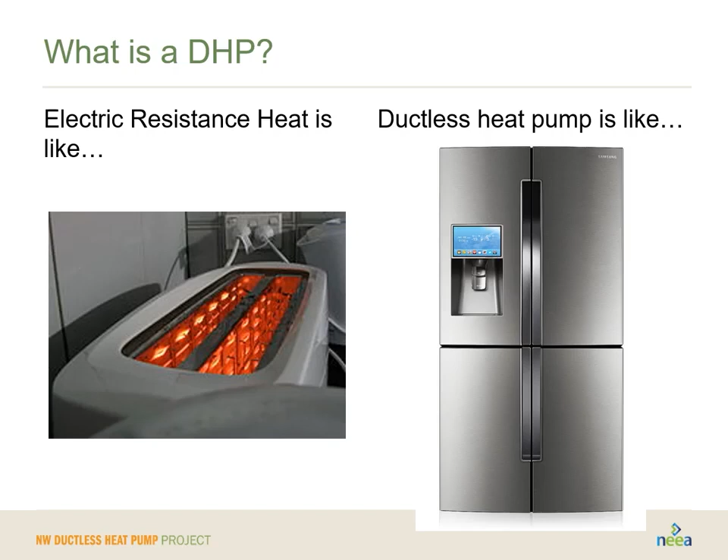So the very basics when you're trying to have this explanation for a homeowner, have them look in their kitchen. Most people have a toaster or toaster oven, and almost everyone has a refrigerator or freezer. That's an excellent starting comparison to help people understand the basics of the technology.

That is the outdoor compressor, and that is where a lot of the magic happens in terms of taking heat out of the outdoor air, putting it into refrigerant and moving that refrigerant into the home, or the reverse, taking heat out of the home and releasing it to the outside. This compressor allows us in a ductless heat pump to do both heating and cooling in the home. So bringing in a DHP, you're actually bringing in a high efficiency heating system and a high efficiency cooling system because of that outdoor compressor.

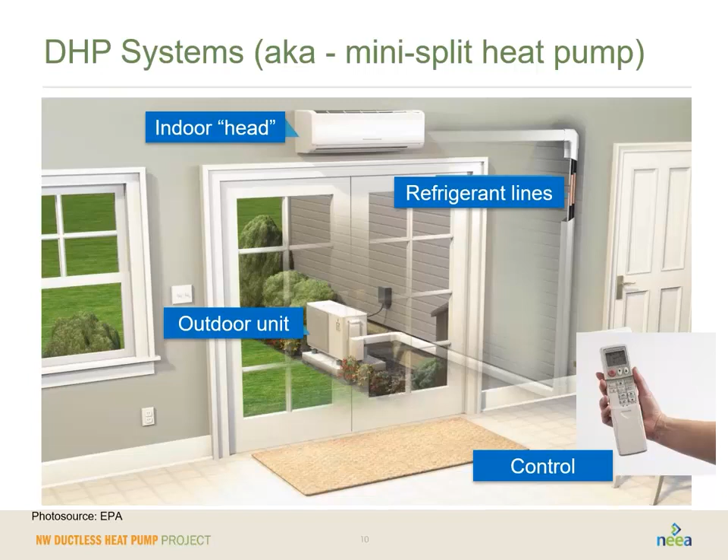Some folks will actually talk about ductless heat pumps and say, are these magic? How are we actually creating heat? And how can this be more efficient than electric resistance? It seems like it's magic. It seems too good to be true. Well, heat pumps don't actually create heat. Heat pumps use refrigerant to move heat.

And believe it or not, ductless heat pumps can actually move heat from outside to inside, even down to 5 to -10 degrees, depending on the brand and whether or not you get what's called a cold climate heat pump. It does this through a cycle where it compresses refrigerant or allows refrigerant to expand. As you compress or expand refrigerant, you can either absorb or release energy. As you absorb energy, what's left behind is a cooling sensation. When you release it or compress it, you create a heating sensation.

So we're just really moving heat around. We're not actually creating it. And it does take some electricity to do this, but we can actually get almost 300% or more efficiency by using these refrigerants and using these outdoor compressors and indoor evaporators to do this kind of work. More so than that, we're actually using energy that's been provided by the sun. So in a way, you could say that these are a type of mechanism that use solar energy.

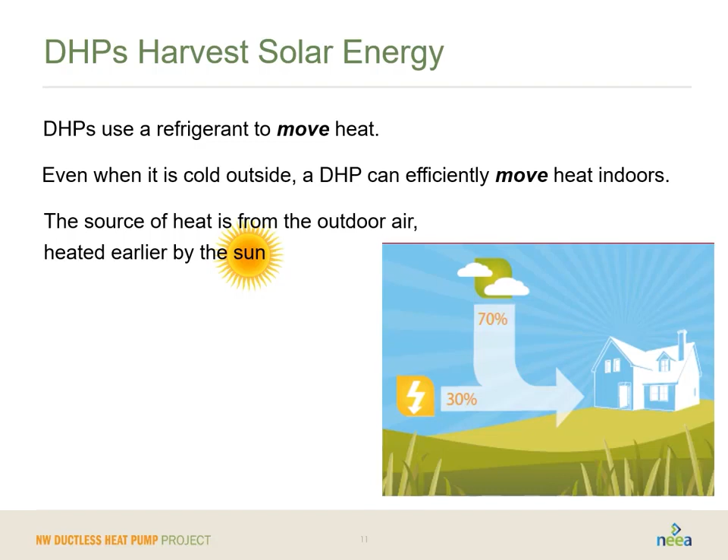And again, even if it's -10 to +5 degrees, in other words, very cold, like some of the parts of the Northwest are, even in those temperatures, there's a reason why it's not -50 at night. There's a reason why it's not -100 during the winter. And that is because that solar energy gets absorbed and re-released. And we're simply using this refrigerant cycle to move some of that heat into the house in the winter to heat it, or to remove heat from the house in the summer to cool it.

Remember I mentioned these things are around 300% efficient. It's kind of like you buy one and you get two free in terms of units of energy. You put 100% electricity in, you get 300% heat or cool out. It's almost a buy one, get two free type of scenario. Again, that's because the refrigerant cycle really works well with compression and expansion of moving heat from outdoors to indoors or from indoors to outdoors.

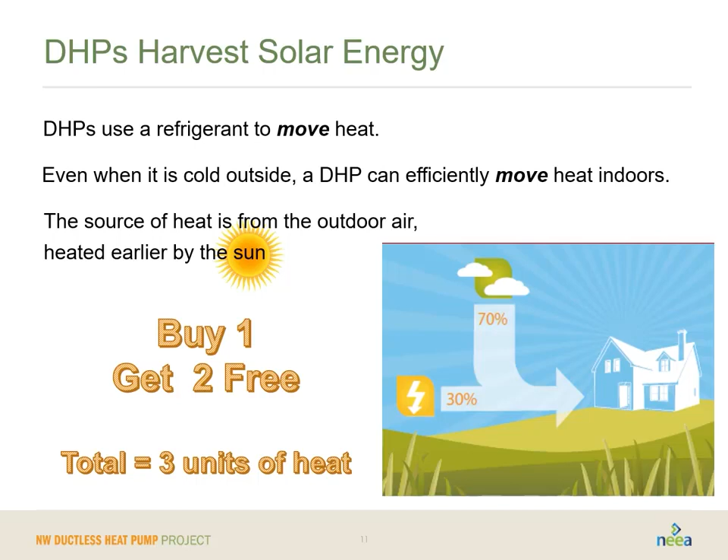Next, we're going to talk about how we communicate this. You can spend a lot of time trying to talk to consumers about the features associated with ductless heat pumps, or you can talk about the benefits. I want you to just mentally think about what we've talked about the last 16 minutes or so. I've mentioned both. What has resonated with you?

Was it me trying to go into detail about expansion and compression? Or was it me talking about delivering heating and cooling and high efficiency and high effectiveness? Think about those. Think about the difference between a device that provides heating and cooling versus a device that provides only heating. Think about that as that difference between what's going to resonate better with your consumer, benefits or features? So, what are some of the benefits with ductless heat pumps?

Well, the very first thing is cooling. These things will provide air conditioning. So, if we're actually approaching a home that has electric resistance heat, and we're going to use a theory called displacement. Maybe we're not going to replace the entire heating system. That's a heavy first cost for a lot of homeowners, and they can get a lot of benefit by simply displacing the heating in the main body where they spend most of their time with a single head ductless heat pump. Well, one of the benefits is they're going to get air conditioning as a part of this.

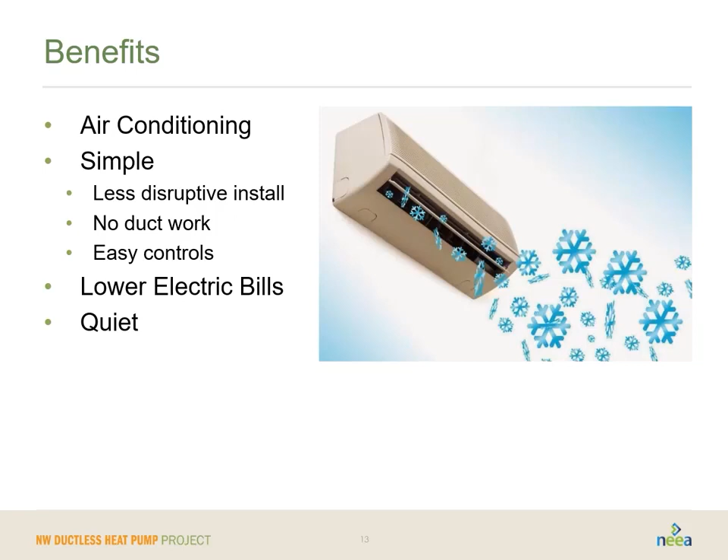So benefits: air conditioning, relatively simple installation, much lower electric bills, and much quieter than the heat pumps of old. So those were the benefits. Now let's talk a little bit about the features. And again, think about what resonates better with consumers. Thinking about those benefits that we just learned, or trying to communicate these features. There will be a small percentage of consumers, typically those maybe that work in the tech sector or engineers or architects or accountants, people who like to crunch numbers and think very logically, may respond well to some of these features, but the lion's share of decision makers who are going to be spending their money are going to respond better to those benefits.

But the features, these things do provide both heating and cooling. That's pretty cool. You can talk about that because unlike an air conditioner, which only has the refrigerant cycle going one direction, heat pumps have a reversing valve that allows it to run both directions. So your refrigerator or traditional air conditioner work in one way only. Heat pumps with that reversing valve allow you to move heat from outside to inside or from inside to outside, so provide both heating and cooling.

They have this advanced heat pump technology. I talked about that inverter-driven compressor, low ambient noise, and they're really getting these what we call cold climate models, or you may hear a manufacturer describe these as enhanced capacity or extended capacity or ultra efficient or ultra capacity equipment. We look at them and call them cold climate heat pumps in the Northwest. They work really well when it's cold outside. That's a feature, but being able to say they deliver heat at 0 degrees or 5 degrees would be a benefit. They have the highest heating season performance factor, or HSPF, on the market in terms of heat pumps. So even comparing it to a standard central heat pump, they are more efficient.

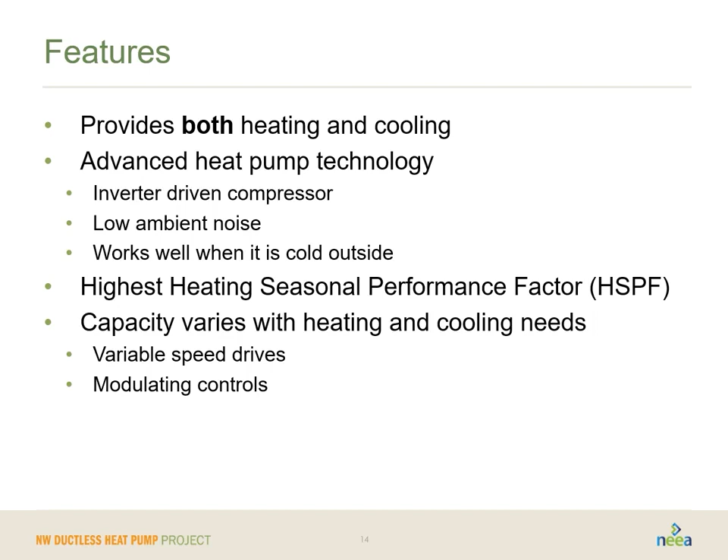And then the capacity, so the amount, or the oomph, if you will, of the heating and the cooling varies with the heating and cooling needs of the home. That's one of the real great benefits with these variable capacity heat pumps, typically these inverter-driven compressors. They have variable speed drives and modulating controls, so when the house needs just a little heat or just a little cooling, it's capable of providing that. When the house needs a lot of heat or a lot of cooling, it's also capable of providing that. As you can see, the features are wonderful and they're important for you as a contractor to know, but I really do want you to be thinking again, how do you want to communicate these to consumers? Benefits or features?

One of the top things we hear all the time is, what kind of savings can we get? While this may not be the number one thing that people are looking for, it's certainly going to factor into their decision making. By the way, we feel and find that most consumers respond very well to topics around comfort, indoor air quality, and performance. After those things are things like the savings that they get. And part of the reason why is we do not have utility costs anywhere near as high as other parts of the country. So it's just simply not quite the same burden. But that being said, there's still a lot of savings available.

If we look at a standard electric resistance system, I mentioned that before, that electric baseboard, the cadet wall heater, the central electric furnace, and we compare a ductless heat pump to that, you can actually see there's quite a difference in the typical heating bill per year. Keep in mind, we use very average costs for the Pacific Northwest. Where you live and where you work and where you sell could be more, could be less than this. Keep that in mind, this is an average amount. A ductless heat pump only providing 70% of the needed heat for a home, so using that displacement theory of just providing a single head in the main body where people spend the majority of the time, even in that scenario where we're not replacing the entire heating system, we're seeing huge savings.

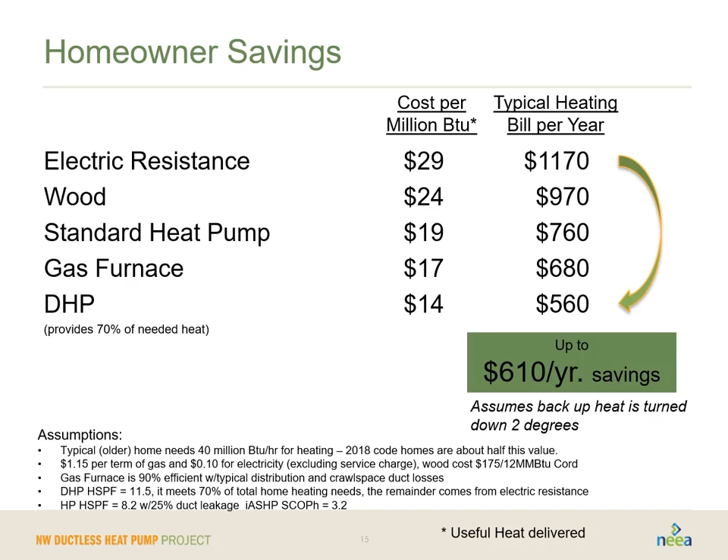Look at that. It's almost a 50% reduction in heating costs for that home. That's equivalent to around $600 a year savings. This is pretty critical. And this is a really nice additional benefit on top of all of those other benefits, as these savings are real. And again, $600 a year, look at this over 7 years, you're talking about a large portion of the cost of installing this has been recuperated.

All right, now let's look a little bit about what we want to look for in a home and our customer. And I do want to encourage you, at this stage of the game, to familiarize yourself even more by going to goingductless.com and looking at the buyer's guide. While that is geared for consumers, it's probably important for you as a trade ally to think about how consumers are looking at this and what we're asking for them. It also kind of walks through some of the ideal home types. And so it's just a different way to think about it than we're going to show you here, but it's really good supporting content. So check out goingductless.com and look at the buyer's guide.

So let's think again about how this typically works. You get a call from a customer. They're asking questions about upgrading their heating system, or maybe they have some curiosity because they've seen an advertisement about a ductless heat pump. We want to start by asking them some basic questions to identify, is this house even a good candidate for it? So we want to look at some things like, how do you heat your home currently? Do you have natural gas or electricity? Do you use a wood stove primarily, or propane? Having a good understanding of this will be critical, because ductless heat pumps, particularly in that displacement scenario that we mentioned, are most ideal for homes with electric heat and electric resistance heating.

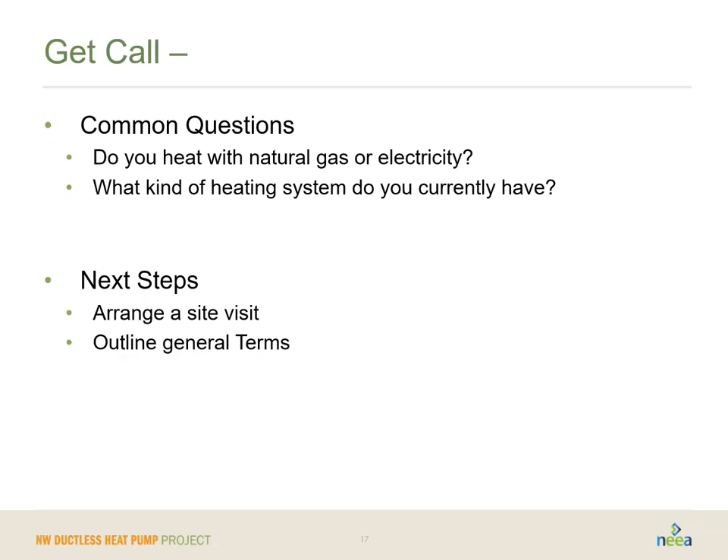So some things that you're going to want to find out when you do that site visit: you want to confirm the heating fuel type. You want to understand the size and how the house is laid out. You'll really want to understand the existing heating system type. Again, is it zonally heated, meaning room by room with something like baseboards or ceiling cable heat or wall heaters, or is it something central and forced air, like a forced air furnace?

And then you want to know the age of the home and whether or not it's been retrofitted or weatherized. Has it been added on to? Has it gone through a deep remodel? Having those kind of understandings about the house will give you a much better sense of whether or not it's a good candidate.

And then things to think about with the homeowner. Do they own or rent? Obviously, an owner is going to have a better return on investment for looking at something like this, whereas a renter may be simply looking for information to give to the homeowner, which can be a little tricky for you as the contractor if you're dealing with the resident, not the person who owns the home.

Look at the length of time they intend to stay in the home. If they're trying to sell the home next year, then the thought here is, are you doing this job because you're trying to solve a pain point for the way they live in their home, or are you doing it to help them increase the resale value of the home? The longer they're planning on staying in the home, the better your argument, or building part of your sales pitch around that return on investment, makes sense.

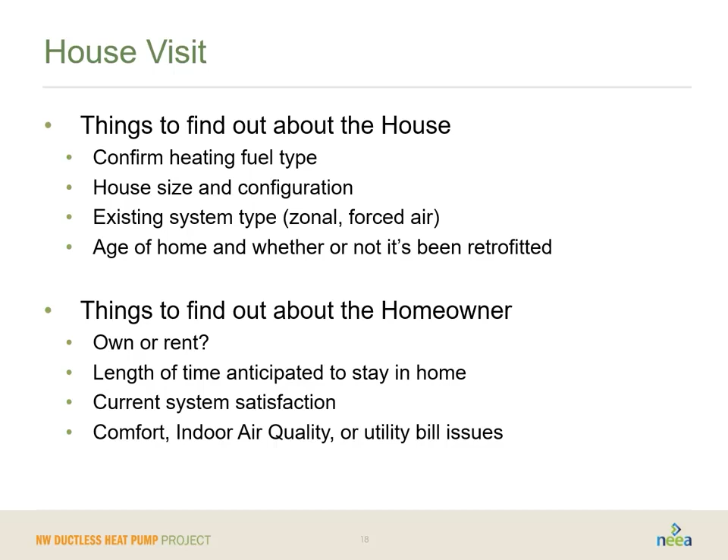And then you want to look and ask a lot of questions: are they comfortable in the home? Do they have any issues with indoor air quality? Do they have high utility bills, particularly during the peak of winter or the peak of summer? Learning these things about the homeowner is going to help adjust what kind of sale you may try to make. In other words, what solutions are you going to try to provide to them?

So what does the ideal candidate house look like? Well, we love simple box, single-story ranch homes. If we're talking about displacing a portion of the heat in that main body of the home, the biggest bang for the buck is going to be the single-story ranch.

Similarly, what we refer to as a box on a box, or two-story home where the upstairs and the main floor have the very same footprint, that's another pretty good candidate, where the people spend the majority of their time in the living room, kitchen, and dining room on the main floor. Again, we can displace the heating and cooling there with the ductless heat pump and allow them to continue to use their existing system in their bedrooms.

Another good candidate, but one that takes a little bit more nuance, is the split level or story and a half home. And this kind of depends on where people spend the lion's share of their time. Is it the middle level or the bottom level of the home? That's what you're going to need to find out to determine where a ductless heat pump head would provide them the best benefit.

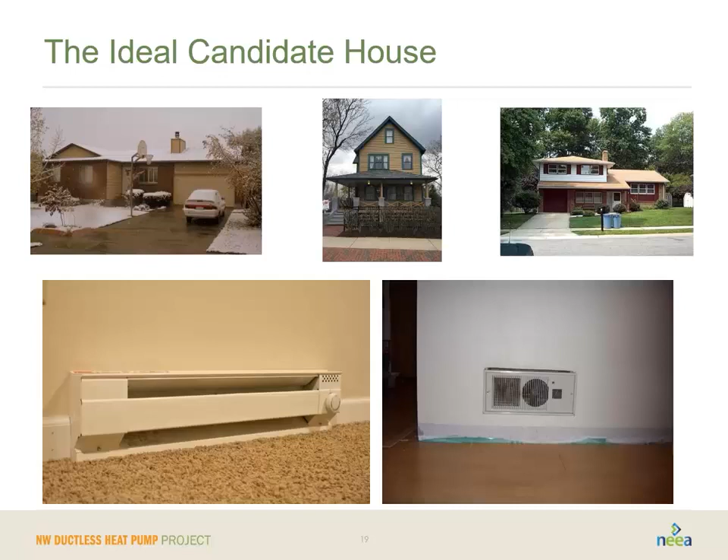And then we really like the homes, again, that have these baseboard heaters or those wall heaters. That's where we're going to get huge benefit with displacing that with a single ductless heat pump head. Okay, we've talked a lot so far about benefits versus features and what to look for in homes and consumers. And now we want to talk about sales and value propositions.

Getting trained at sales actually is part of selling more effectively and making more money. This is from an energy efficiency program in Colorado. And we're using this as an example because in this scenario, the program and the contractors went through a bunch of sales training. And when they first started, they had pretty decent close rates. You know, almost 30% of the projects that had a first call from a homeowner resulted in work being done. That's not bad, actually. And in your experience, you may find 30% has worked for you.

After they went through some pretty detailed training on sales, however, they were able to increase it to almost 66 to 70% of the homes having some work done. So think about doubling your close rate, or better in this case. So the average cost per sale, in other words, the money that was invested that turned into a sale, whether that's the time spent paying for a sales agent, as well as putting marketing into the account, or even buying leads, is a dramatic cut. So sales training actually can make a big difference.

We're not going to claim that today's module is really going to do all of that work for you. We hope it's just enough to get you started thinking about this, though. And if you can start employing some of these practices, we may see you inching from a 29% close rate towards that 71%. And it may be just enough for you to inquire about future and even more detailed sales training for your staff.

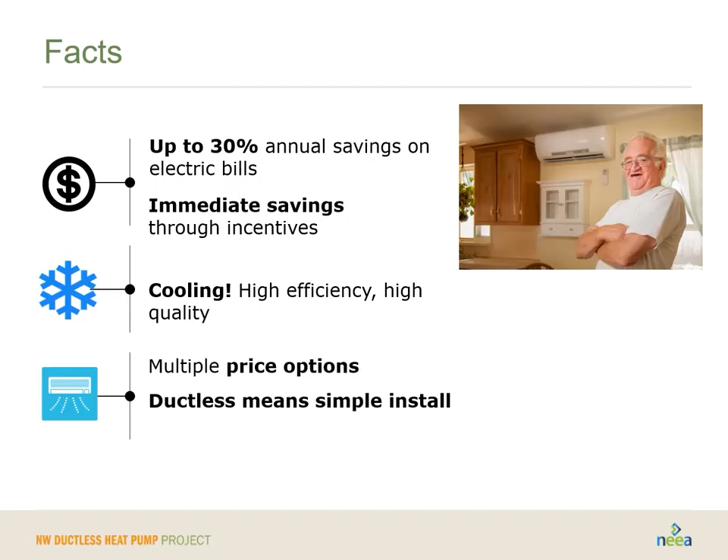So if you've been doing contracting for a while, or you've had any job in sales, hopefully this established sales technique is going to feel very familiar. This is actually an updated version of what Honeywell introduced in the 1970s to the marketplace in terms of the 6 steps to sales. We've updated them a little bit here for the sake of integrating them with today's training, but it starts with coming in and listening to the pain points, understanding why did the customer call you?

What is it that they're trying to resolve? And then through this process, establishing trust with them. The better a listener you are, the more questions you ask them about themselves and how they live and what their challenges are and what they want out of this, the more you can establish trust.

Then you use that and you start to evaluate the home and the systems, understanding those pain points. From that, you can design a series of solutions. Again, we'll cover these in a few minutes about what those may look like, and offer ideally 2 to 4 choices. We'll just say offer 3 choices.

It's amazing how often if someone is given a low, medium, and high choice, whether that's from the cost perspective or the performance perspective, our psychology as humans wants to draw us towards that middle selection. It feels like the safe choice. So offering that is going to give you the best bet. Make sure that your standard product that you offer the most often is your middle of your 3 choices.

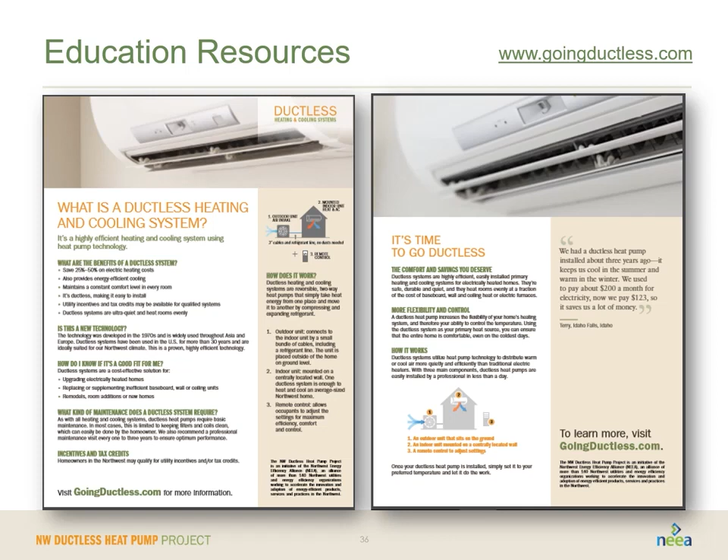There's tons of educational resources here as well. Everything from explaining what a ductless heat pump is to talking about when is a good scenario and a good time to move to ductless heat pumps. And again, all of this is available at goingductless.com.

One of my favorite pieces is the living the ductless life infographic. This is a great piece to have printed. It's really nice to have in front of the consumer for that kitchen table conversation. Really make sure they've got something in front of them that is warm and friendly and expresses both those benefits and the features, or touches on the emotional as well as supports the facts.

There are some other places as well. One of our partners, Bonneville Power Administration, or BPA, also has an HVAC technology guide that's available, and there's a link here at the bottom of the screen you can see. If you can even just type this into your search engine, BPA HVAC technology guide, this will be a really nice piece for you.

When you dive into this, it actually goes pretty detailed into things like what are some of the basics around HVAC, what kind of technologies are available out there, and what other topics are related, things like building codes and federal efficiency standards. This is really great additional training information for you as a contractor as you're getting yourself geared up and really putting ductless heat pump as a key part of your business.

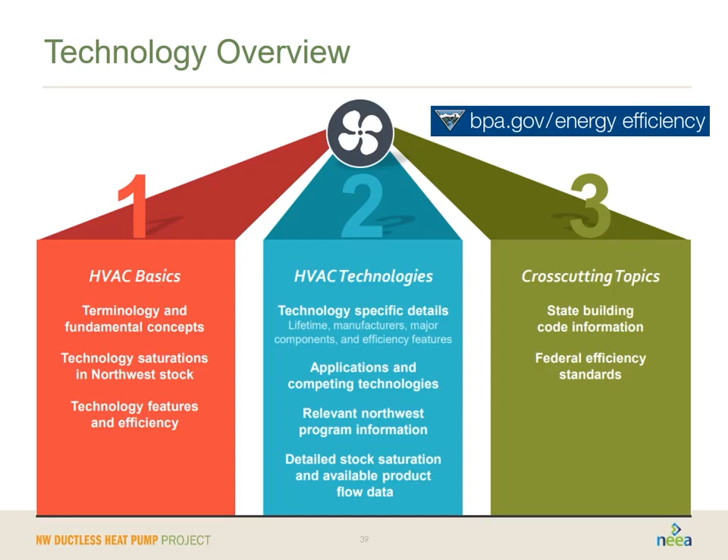On top of all this, what we're introducing to you through these modules is just the briefest of introduction to hopefully get you thinking that ductless heat pumps might be something you want to integrate in your business. You're going to want to get more training. GoingDuctless.com actually has, if you go through partners or trade allies, which is a little tab in the upper corner, you can learn a lot more about trainings and events in your area by clicking on the trainings and events links. You can also partner with manufacturers and distributors because they are the ones providing a lot of the industry training that's out there.

We talked a little bit in the business case and in some of our other resources about identifying manufacturers and distributors that are going to work very well for you. One of the core things to think about is the type of training and support they provide around their products. There are more manufacturers and distributors than what are listed here, more than we can fit on a page, and these are listed alphabetically with no preference given to any one or the other. All of them have different things that they excel at, so finding the one that works for you is going to be really important to get more training that works for your business.

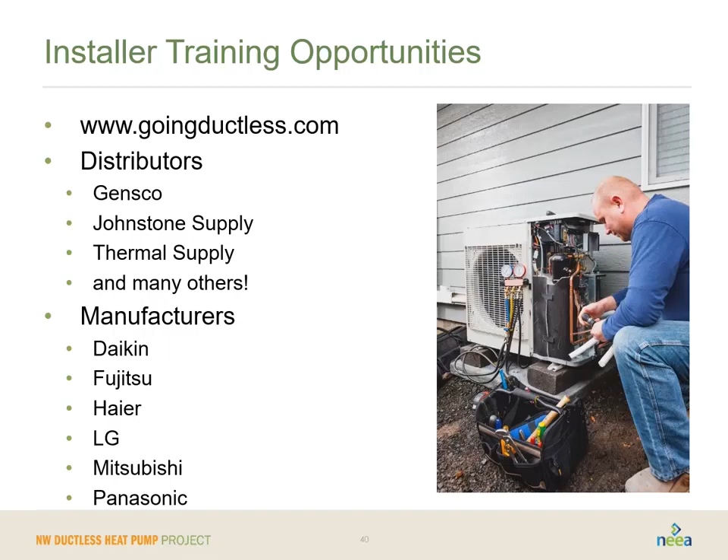So far we've gone through the business case, which was part A, and part B here today was the sales basics. There are two other modules if you'd like to continue down this path. Part C is the design basics. What are the things that you need to be thinking about as you're designing a ductless heat pump system? We'll talk even more about that displacement I mentioned there. And then we'll talk a little bit in part D on installation basics. There's also a whole other series on contractor best practices. Those are some other recorded webinars that already exist, and we will guide you to them as we move along.

If you have some desire to get some hands-on direct training and support, that is available on a case-by-case basis. If you want to reach out to us, we can help connect you to either good manufacturers and distributors, or in some cases even work directly with you and create a case study on how you developed your business.